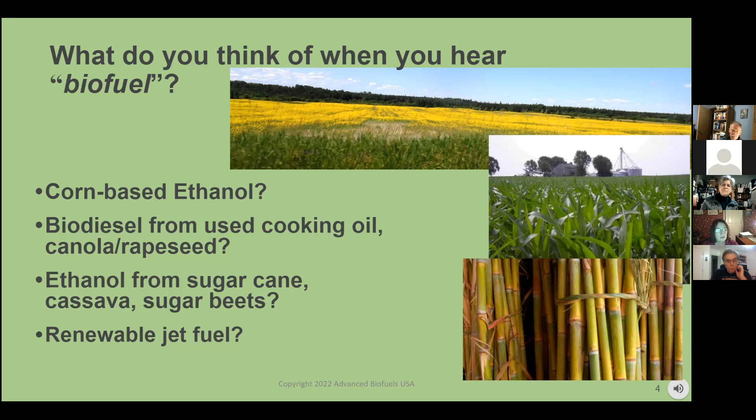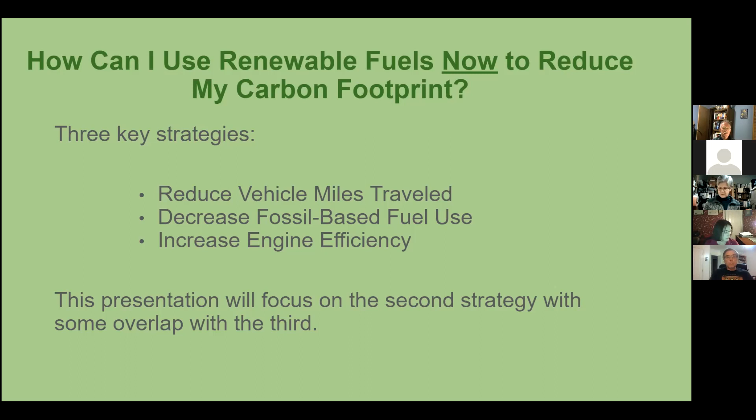What we're going to talk about a little bit is how can, we talked about what have you done this week, so I'm going to give you some ideas, or what you have done this month, of what you can do. I'm going to mostly talk about the second one on the list, decreasing your fossil-based fuel use, but a little bit on the third one as well.

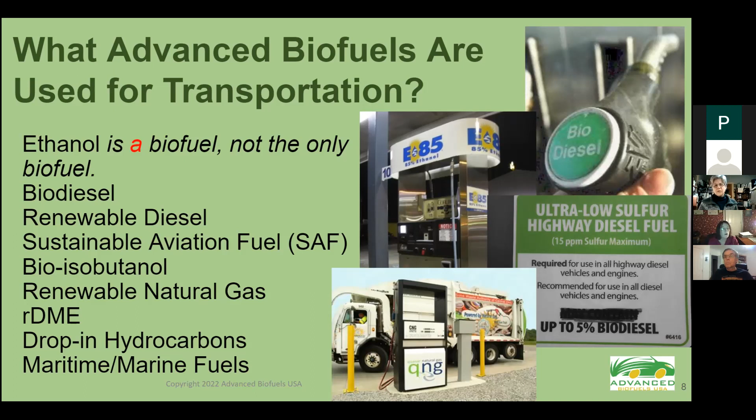So what are biofuels? What are renewable fuels, which is what I prefer calling them, and you'll see why. So what are they? Like we talked about, ethanol. Ethanol is a biofuel. It's not the only one. There's all of these other things that we can bioize. Sustainable aviation fuel has been in the news a lot, but there's anything that's fuel we should be able to get off of our petroleum and natural gas and renewabling it.

You'll hear about first generation, second, third, fourth generation. First generation is usually thought of as corn-based ethanol, sugar cane, soybeans, things like that, whose primary purpose is thought of as food.

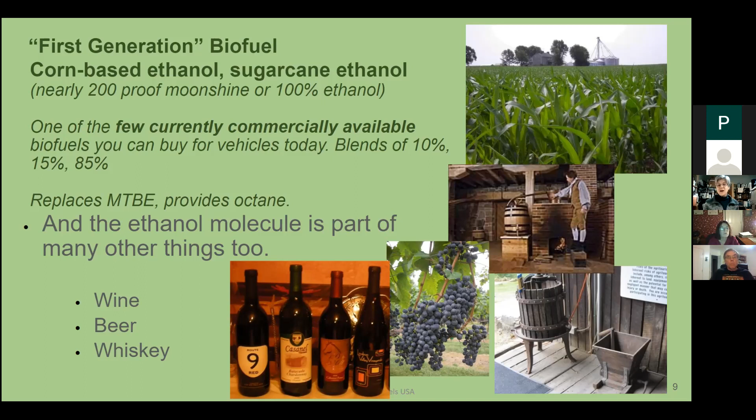When we talk about this, though, there's other things about ethanol to just know. You can use ethanol today. We all use it. You put gasoline in your car, 10% of it is renewable, as ethanol. Mostly because that ethanol replaces MTBE, which was a carcinogen that was banned in lots of states. And people might not realize sometimes the ethanol that's in your car is that same ethanol that's in your wine, your beer, your whiskey.

Like I say, talk about the 4 generations. What are advanced biofuels used for?

In history, the first Model Ts were built to run on ethanol, which, if you think about it, makes sense because there weren't gas stations on every corner, but everybody could make ethanol. So you would be able to fuel your car renewably and with the stuff that you used to use to feed your horses. So that was the idea, was that it was going to be a very distributed resource.

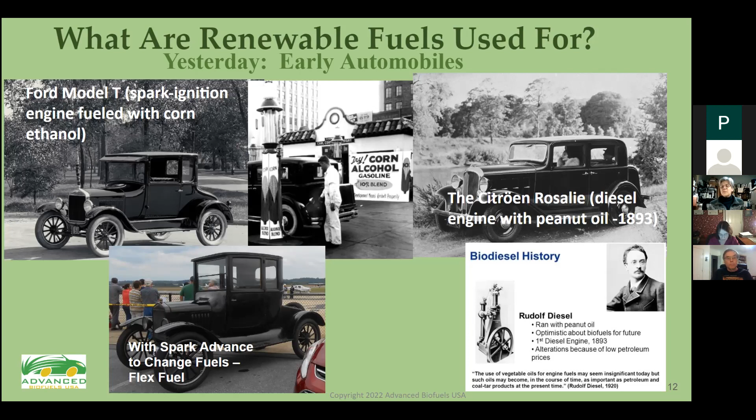And then the first diesels ran on peanut oil. Like I said, we started using ethanol to replace MTBE. MTBE was used to replace lead. So to get the lead out, we put in MTBE. To get the MTBE out, we put in ethanol. It also is very high octane, so you get higher performance.

And then other biofuels that we use are low sulfur diesels. So the renewable diesels fit in well with our working toward reducing the other pollutants that are in our fuels.

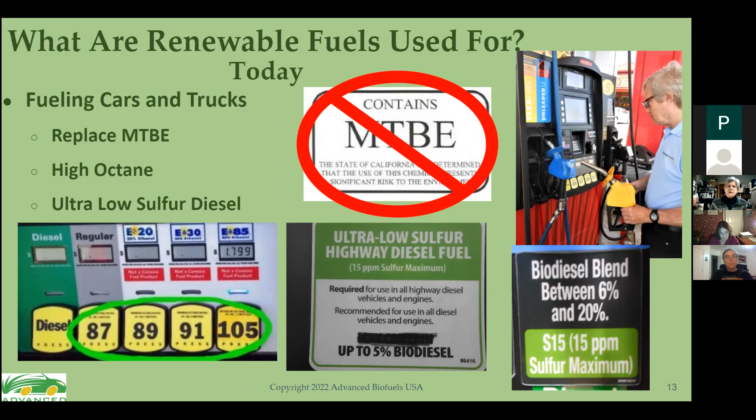How do we use them today? Racing. NASCAR uses E15. The Formula One is really where the innovations are happening now. And aviation, I think it's Netherlands, the airport in Amsterdam has started having a little bit of renewable fuel in every flight. There's not that much made yet, so it gets sort of spread out.

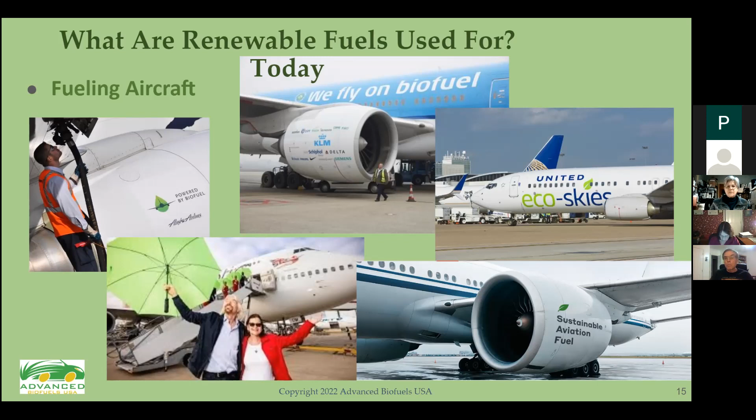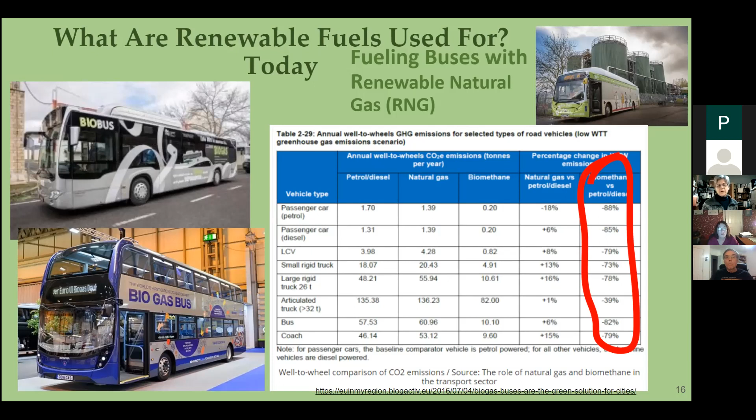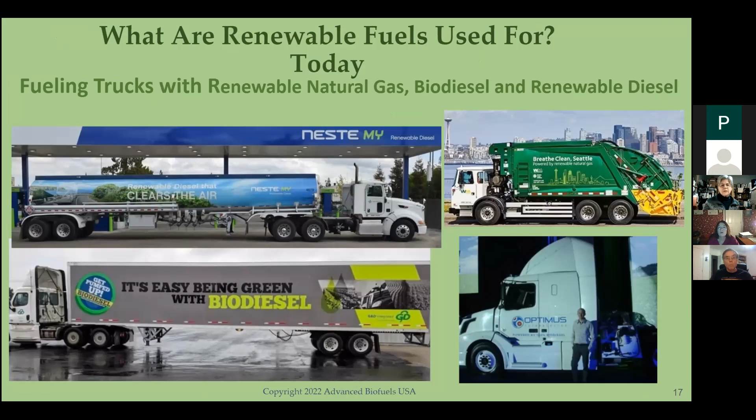And we use it in trucks, renewable diesel, biodiesel. We're starting to get to use it in trains with diesel technology, diesel engine trains. And then if you have a flex fuel vehicle, you can use up to 85% renewable. Your car will have something like that on it, or you can see it in your owner's manual.

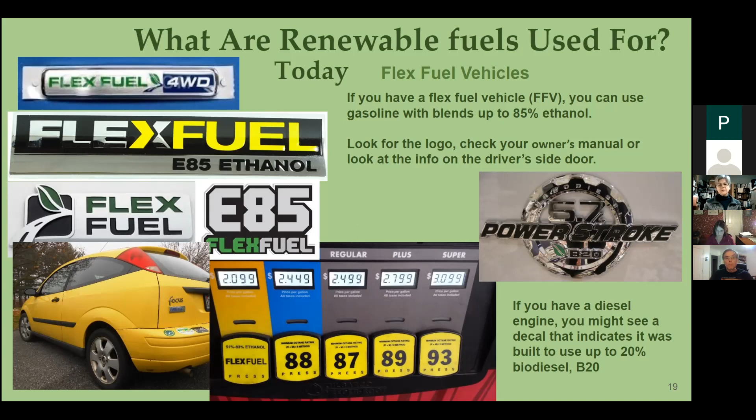We retrofitted my 2002 Ford Focus to be able to use E85. And also there are trucks, a lot of the manufacturers of diesel engines are warranting them up to 20% biodiesel. But if you have renewable diesel, you can use 100%. And how do you find your E85? There's an app for that.

The other thing is maritime fuels. This is becoming really important because the International Maritime Organization has regulations against sulfur, and using renewable fuels can address that need to get rid of the sulfur in your fuels. So there's a lot of interest in that use.

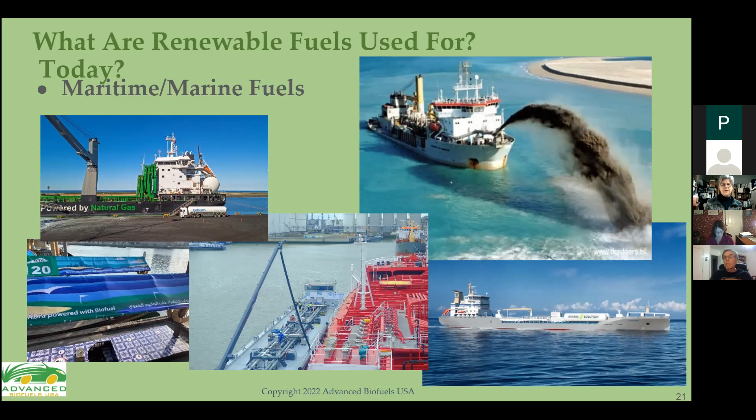There's military interest, although a few years ago there was more interest than there has been recently. However, with the price of gas and oil going up, the government will buy renewable fuel for the military if it meets mil spec and is at a competitive price with petroleum fuel. And with the price of oil going up, they may be using more than they were.

Although California, because of their laws and regulations, is really soaking up most of the renewable diesel and jet fuel. It can also be used for heating oil. New York and some of the Northeast states are really getting into requiring some portion of the heating oil to be renewable.

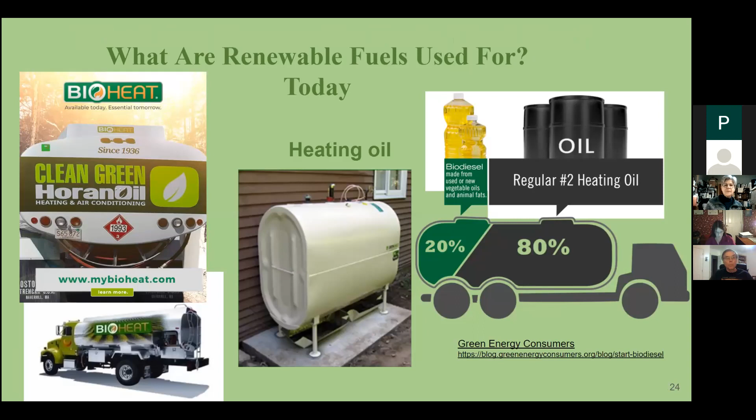And then a lot of people don't think about this, but cook stoves. In parts of the world where you use dung or wood to cook, that has lots of smoke and harmful health effects, so replacing that with a clean burning fuel like ethanol is really important. There's an organization called Project Gaia that's actually headquartered up in Gettysburg that does a lot of work with the United Nations on that.

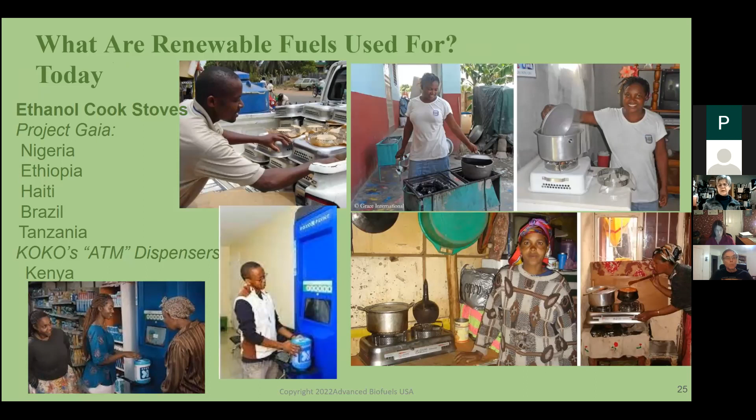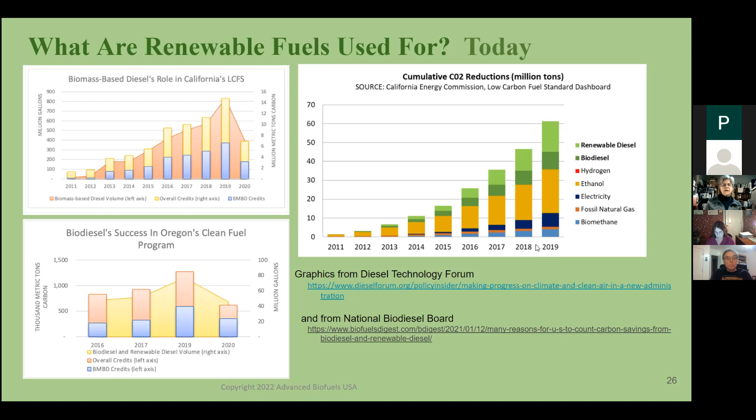So tomorrow, what will it be used for? We can talk about fuel cells, electricity through fuel cells in cars, with hydrogen or ethanol being used as the hydrogen carrier. And advanced engines - E30 now can be the sweet spot in engines. Like I said, there's our old Focus that was being retrofitted.

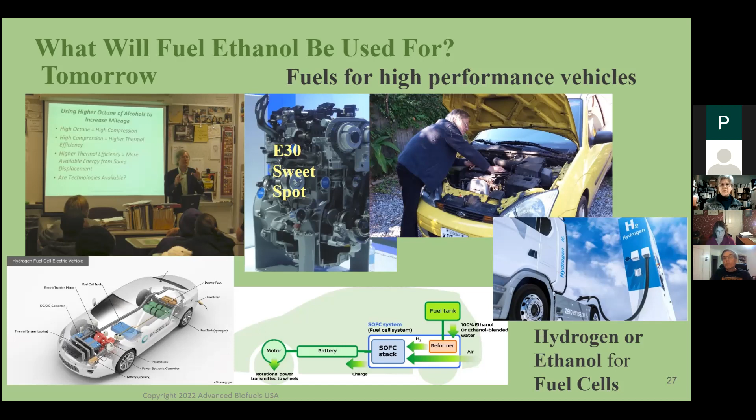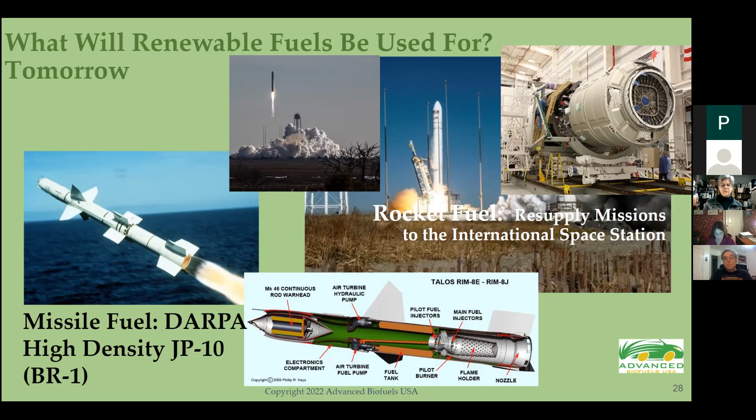So how are they made? The main point is that if we're going to get off of petroleum and off of fossil natural gas, it's going to be agriculture, forestry, aquaculture, and waste management. That is where we're going to have to be finding our energy. And the point we try to make is not - I don't like policies that are all of the above. I want all of the above ground. I want to be recycling the carbon that we already have taken out of deep storage.

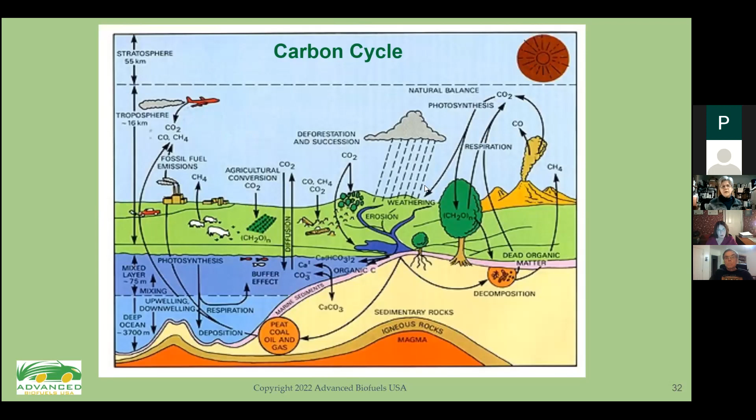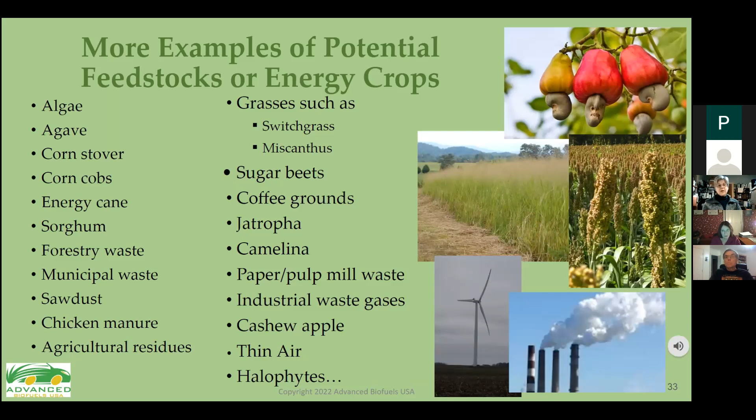So how are we going to do that? Here is a list of some of the things that you can use to make renewable fuels. But this is not fun to look at a list, so we're going to look at a lot of pretty pictures. So you've got grains like sorghum.

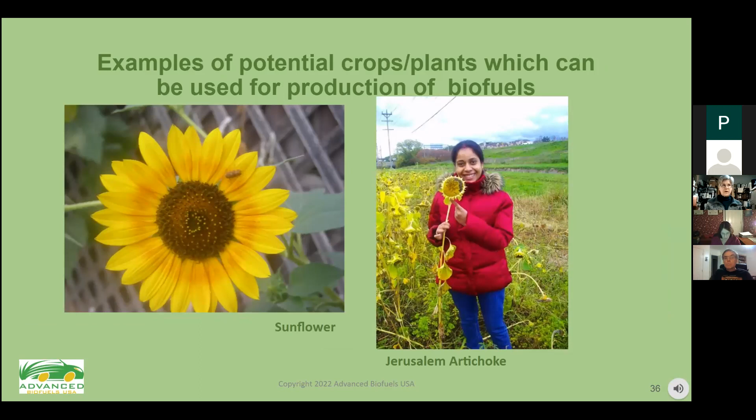We've got soybeans, and oil seed crops like sunflowers, Jerusalem artichokes, canola, carinata, camelina, pennycress. A lot of these can be winter crops, cover crops, or rotation crops. So you can help do your regenerative agricultural practices by using some things that will also have a market for.

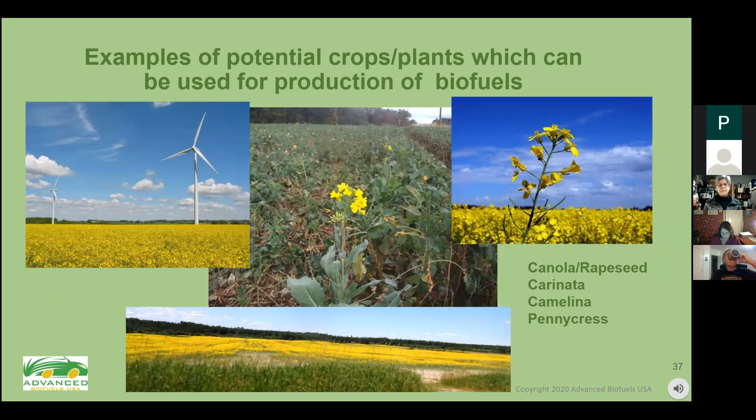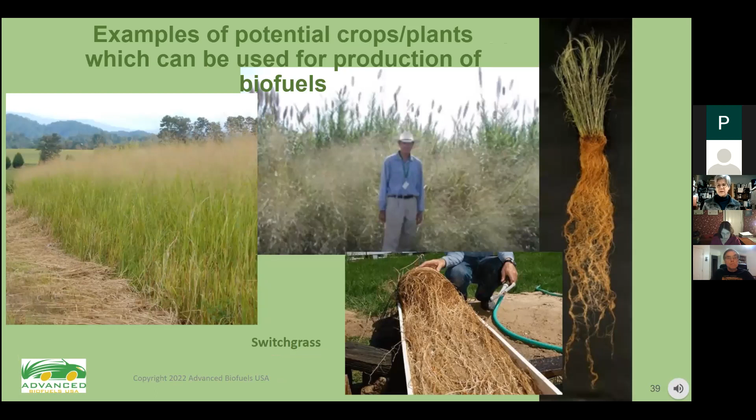And grasses. One of the things about grasses is it might also be planted as erosion control, because look at those wonderful roots.

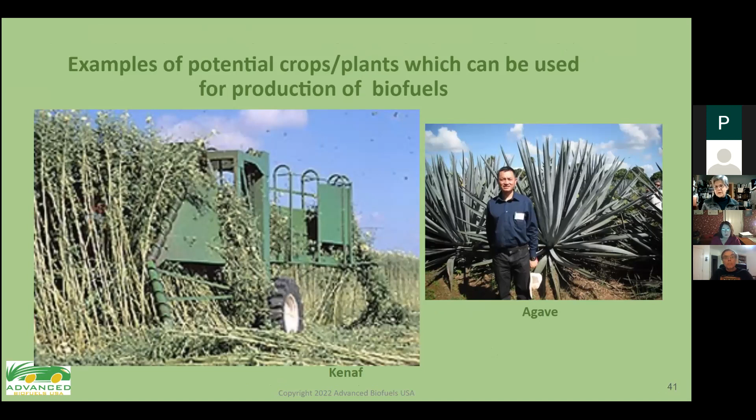Energy tobacco that's being researched down in Virginia. Kenaf, agave - depends on where you are in the world on what is the appropriate feedstock. Cassava, or these different oil seed trees like jatropha, moringa, pongamia, castor bean, jojoba, neem.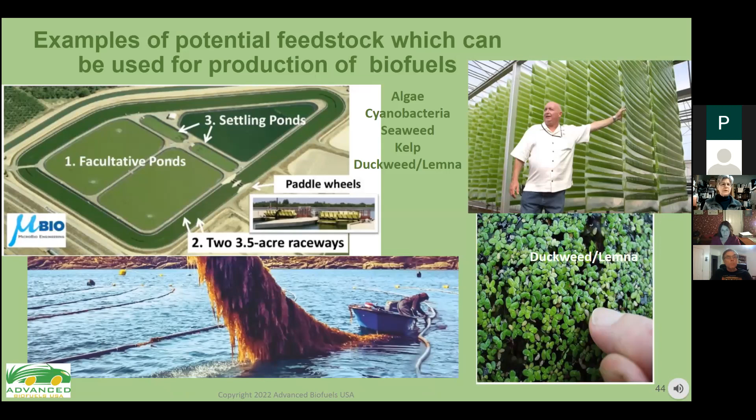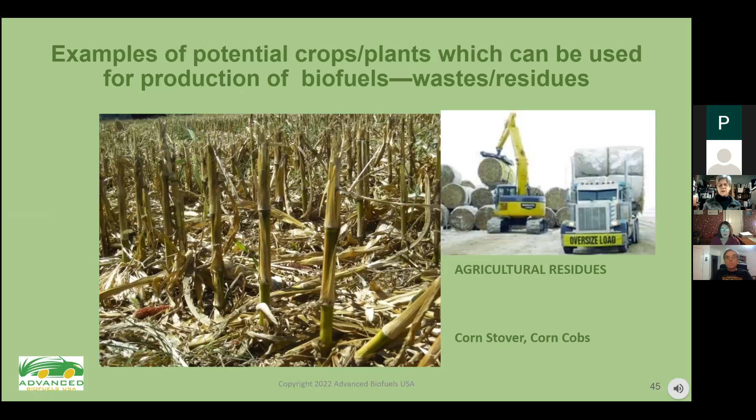Agricultural waste and residues like corn stover and corn cobs, sugarcane bagasse - the leftovers when you make table sugar out of sugar beets or sugar cane, what's left over to be able to make it. And then there are beets as an energy crop - these pictures are from research at University of Maryland Eastern Shore a few years ago.

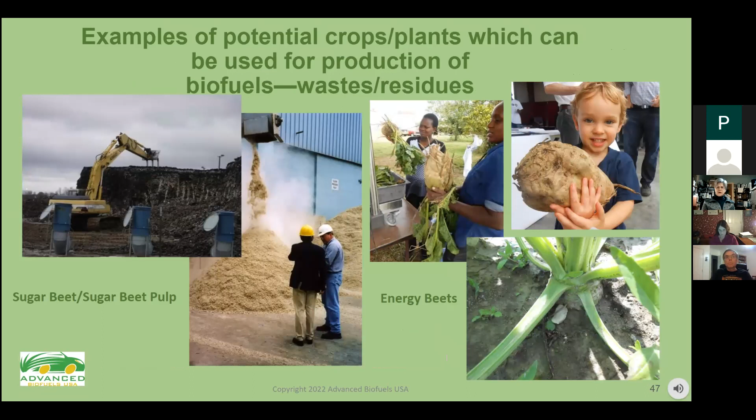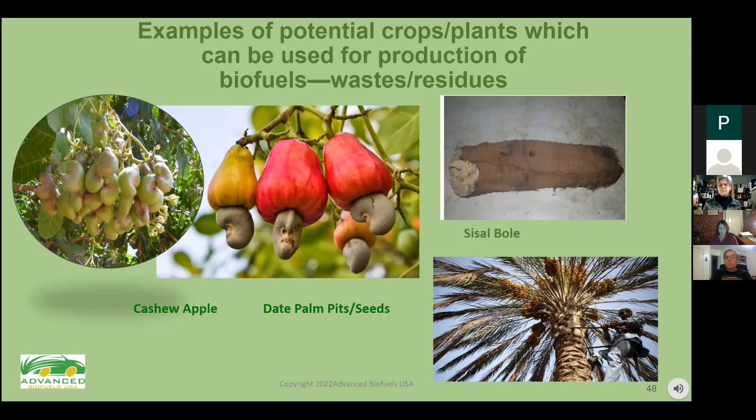And also other agricultural waste. I was amazed to know that there is what they call this cashew apple on every cashew, and that is all agricultural waste. So in Tanzania, they're working on trying to ferment that and make ethanol out of it. And then you've got other kinds, like date palm seeds, things like that.

So the research being done is taking the residues, because you only use the buds if you're going to make your medical or recreational marijuana, or only use the buds for your CBD oils. So the whole rest of that plant is available to convert to the building blocks of fuels and chemicals, replacing petroleum and natural gas. That research is being done at Hood College, at UMES, and at Ohio State, a group that is working on that research.

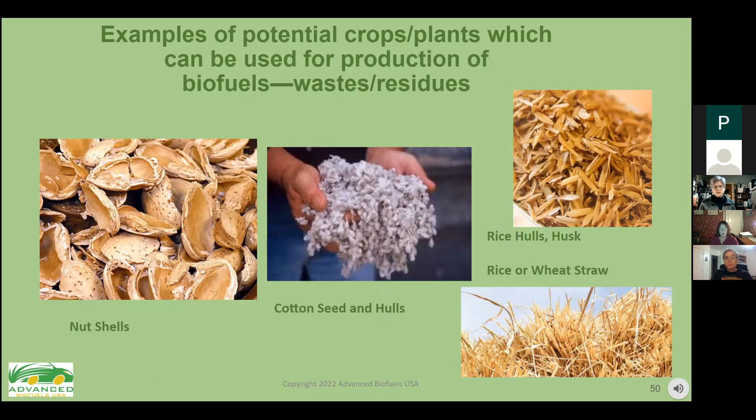Nutshells, rice, wheat straw, all these agricultural or forestry residues, the sawdust, or growing crops specifically as energy crops, either for pelletizing for heat and power, or for renewable fuels.

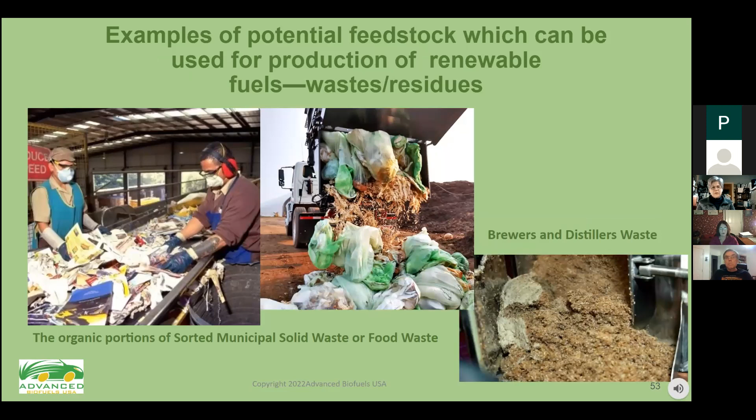And waste: your municipal solid waste, food waste, distillers waste, brewers waste. We've got a lot of that around here in Maryland, and using that.

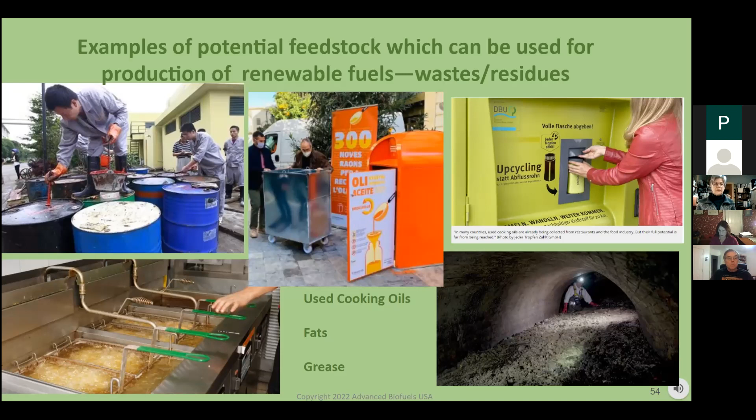And you've probably heard about used cooking oils, fats, and greases. This picture in the middle is in Valencia, Spain, where neighborhoods have places where you can take your used cooking oil, and it gets collected and turned into renewable fuels, or added for animal feed. This picture on the right is what they call a fatberg in the UK, where people have thrown their used cooking oil into the sewers instead, and you get these horrible, awful clogs. So making renewable fuels out of it would be a better idea.

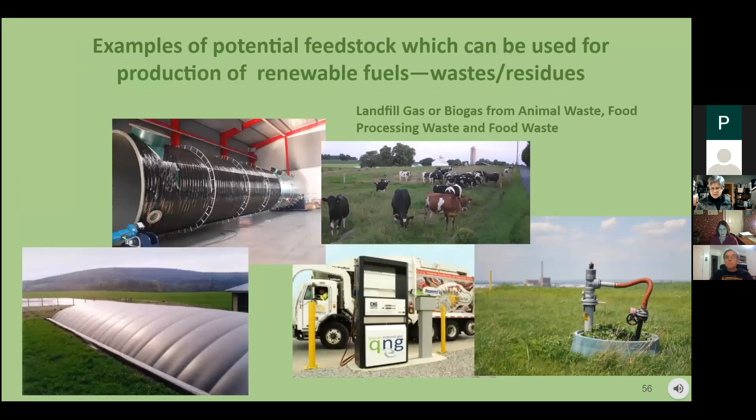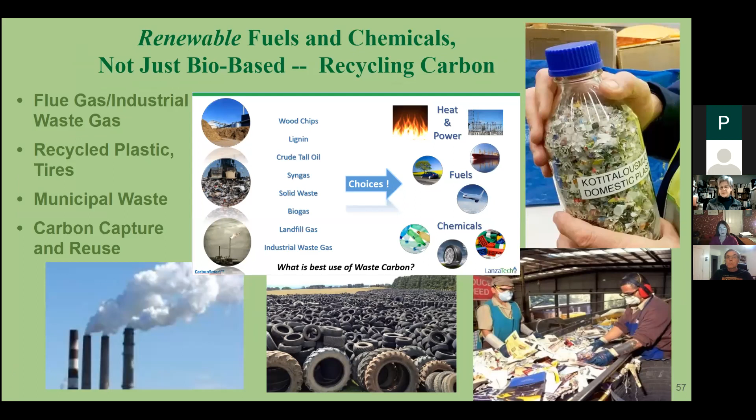Tannery waste, landfill gas or biogas from animal waste and food processing, flue gas, recycled plastic and tires, municipal waste, carbon capture and reuse — all of these different things go through a process to make renewable fuels.

And here's another reason I like calling it renewable fuels. We've got hydrogen. Hydrogen can, like we said, fuel cells, or green ammonia, particularly for maritime things. And then my renewable hydrogen plus captured carbon dioxide — you can then make renewable fuels out of that.

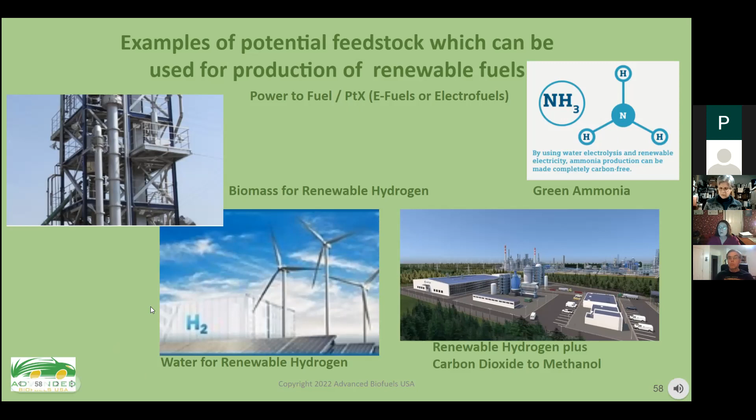So it's a balancing act. How do you get the best out of what you have available?

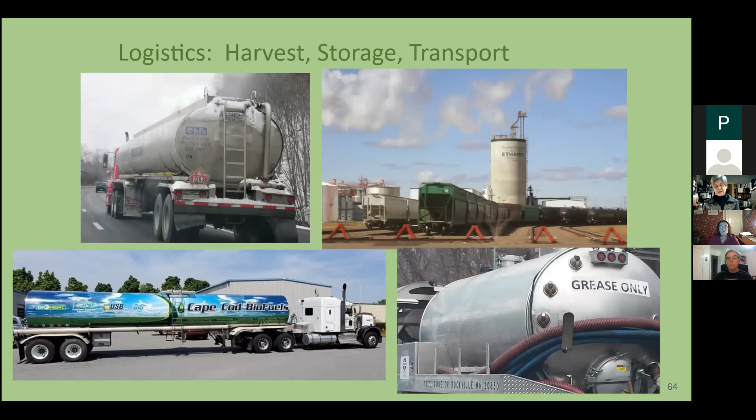On logistics, you've got to move this stuff around. You've got to harvest it, you've got to store it. When you make the fuel out of it, you've got to move that around. You're collecting grease — you've got to move your grease around to get it to where you're going to turn it into fuel.

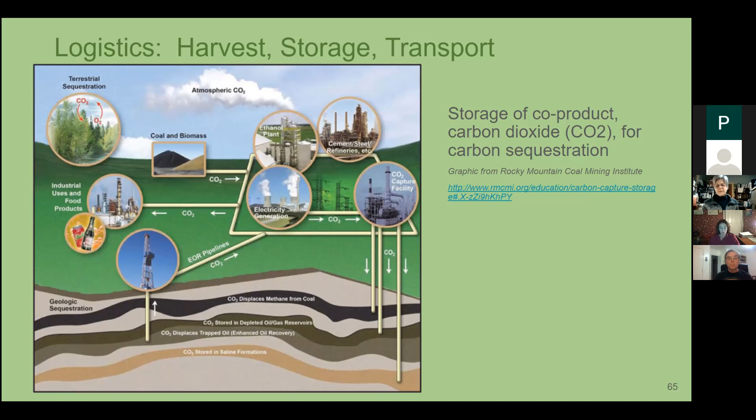If you're capturing that carbon — if any of you have made beer or wine, you know you get carbon dioxide as it ferments. At these big ethanol refineries, they have lots of carbon dioxide. They can sell it for putting in beverages, for medical uses, for food processing stuff, but they can also make enough to store it underground, to capture it and store it. There's a facility in Illinois doing that now.

Technology — you've got lots and lots of feedstocks. You have lots of different ways to deal with them, to convert them into the building blocks of your fuels or chemicals and everything that you get out of your fossil fuels.

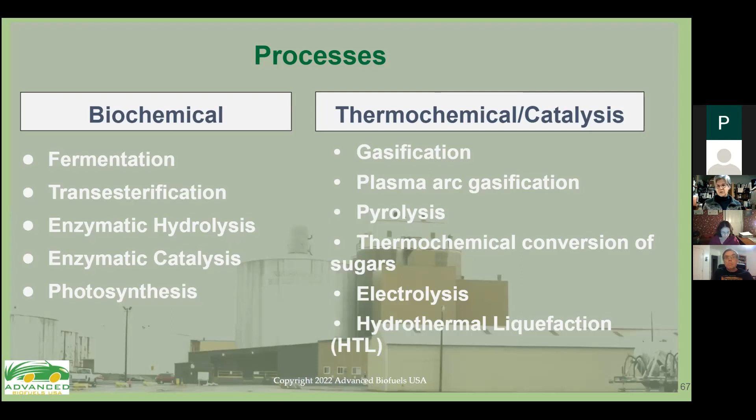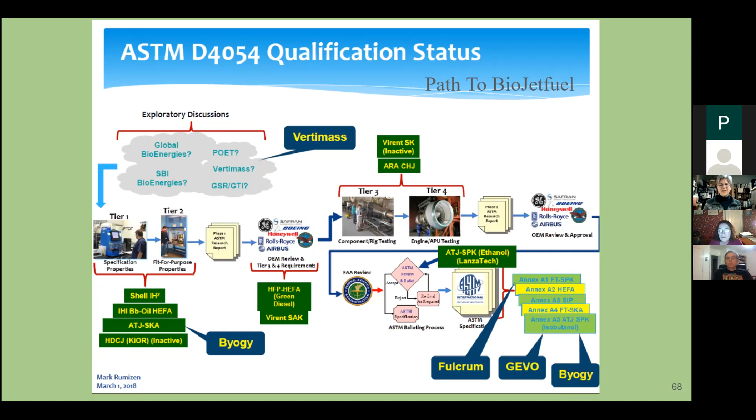If you're making jet fuel, this is just to assure you that there's a long process between making the fuel and getting it approved for use. This is generally a depiction of the process that has to go through.

What we've talked about here is generally, when we talk about biofuels, it starts with something living. There's a process that it's going to go through to take that apart, and then other processes that it's going to go through to put it back together to make our final products.

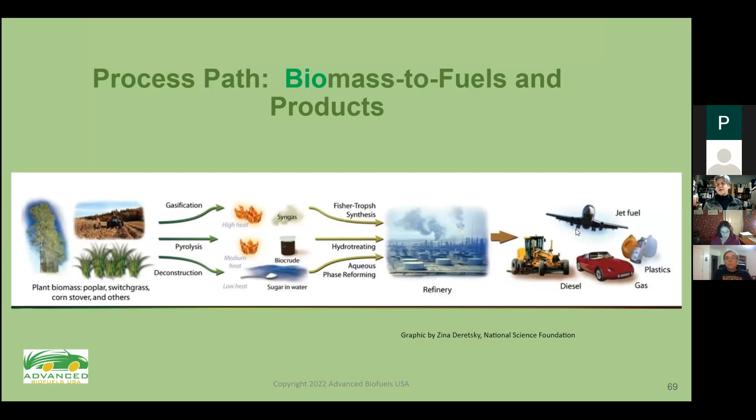But it's not all bio, like we said. So some of them are going to be e-fuels. You might have electrolysis where water is basically your feedstock, and that's where you get your hydrogen. You can also get hydrogen from bio sources, like biogas, landfill gas and things like that. But a lot of the time water is going to be your feedstock for making hydrogen, and then you connect it to CO2 from various sources to make some of your fuels.

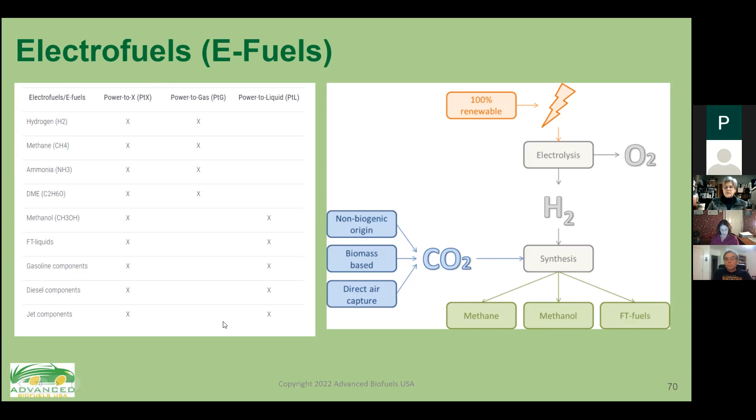And here's a list of some of the fuels that would be included as an e-fuel or electrofuel.

And then there's recycling plastics. I think there's some interesting sustainability conversations to have about this - recycling plastics into plastics, or recycling plastics into fuels. If all the plastics were bioplastics, putting them into fuels wouldn't be such a big deal. But is plastic sort of a way of sequestering carbon? Should we just keep plastics staying plastics, just keep recycling plastics into more plastics? We've all got computers, they're plastic. We're not going to live without plastic.

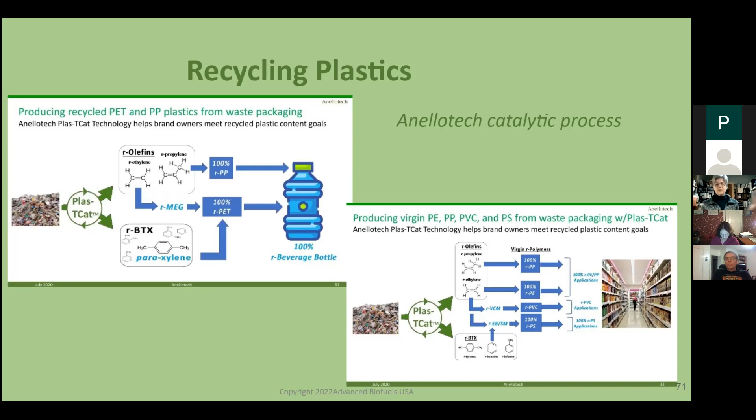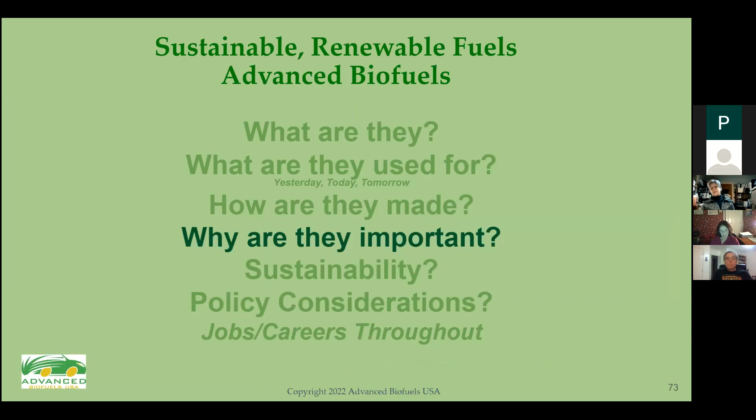Green ammonia, like I said, for maritime fuel. And why are they important? They're important because this is what we have, and this is what we could have instead.

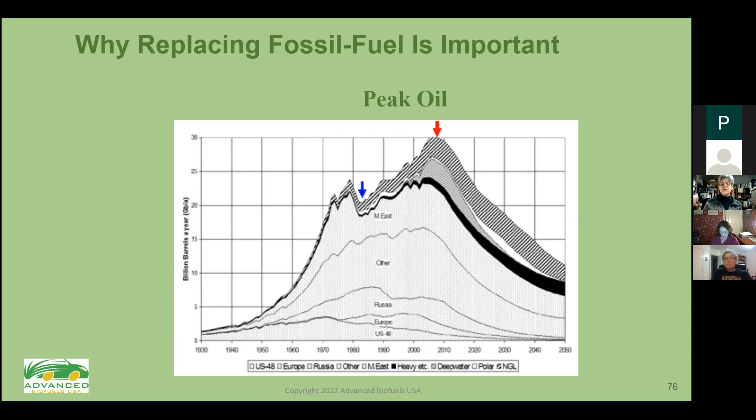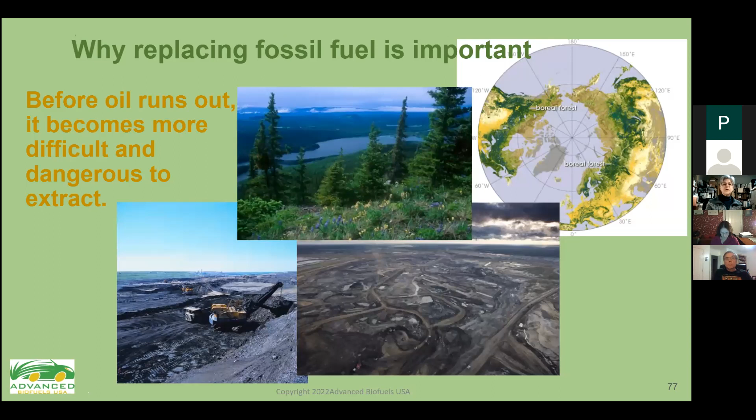Eventually, if we keep going as we are, we're going to have peak oil. But if we stop using petroleum, we may never reach peak oil, and that's going to be just fine. The other thing is, before that oil runs out, it becomes more difficult and dangerous to extract. And this is where I'll take a moment to remember the 11 people who died because we're using oil.

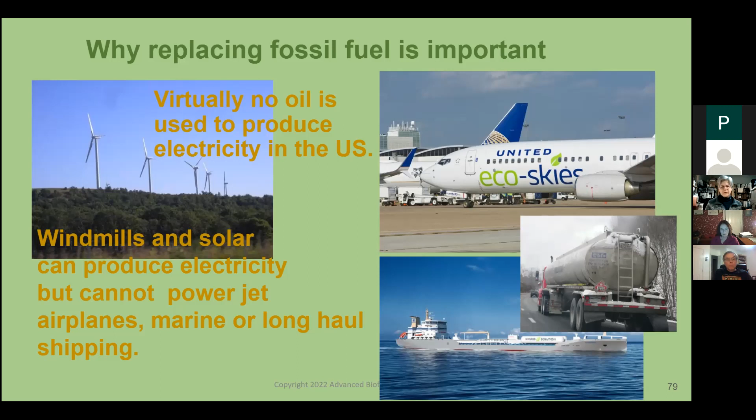We don't use oil to produce electricity in the US, very little. So wind and solar aren't going to replace oil, especially here.

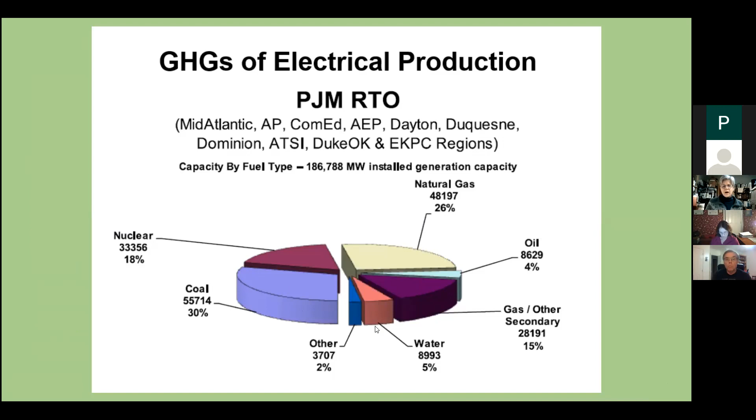If the electricity projections don't come out the way that we think they will, this is really, really essential. Even if they do come out the way we think they will, and even if this electricity turns into renewable electricity, we still have a lot of liquid fuel here that we're going to be using, and that should be renewable.

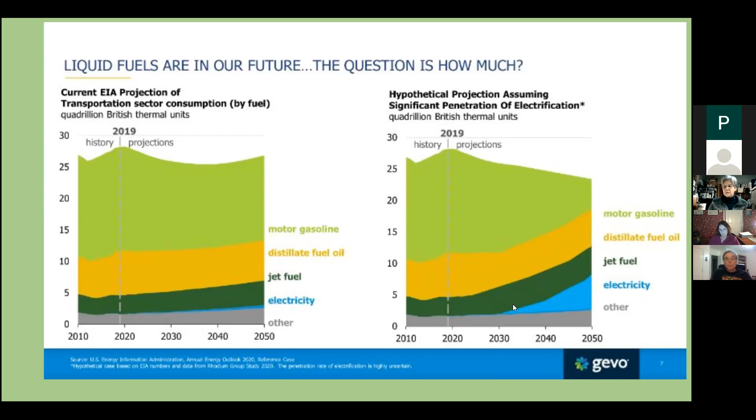And then there's the geopolitical issues. Some of you may not be old enough to remember the gas shortages in the 70s. If you're not making your own fuel, somebody else can control you - just ask the folks in Europe about what's going on with Russia.

And I said before about MTBE - a bunch of states banned it, and so ethanol was used as a cleaner replacement. Maryland is very famous in this because there's two big lawsuits about the water table that was damaged from MTBE leaking out of gas station tanks. I think the people in those areas are still getting bottled water.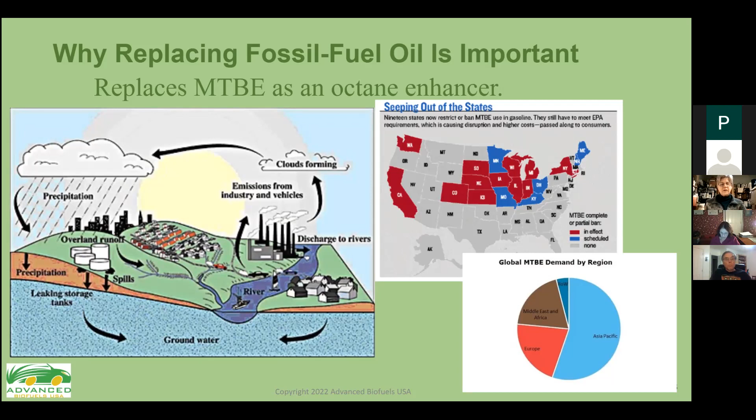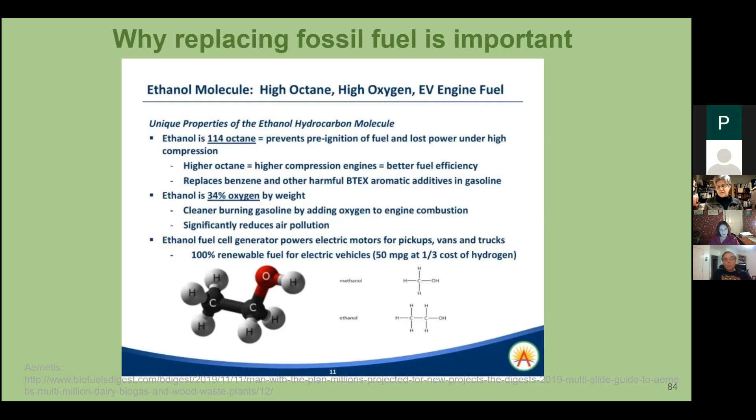An ethanol molecule is a really, really useful molecule for addressing a lot of these things that we talked about. It's got high octane, and it can replace the MTBE and perform as a wonderful fuel. Now, it isn't as dense as petroleum fuel, so you'll lose mileage, but there are engine developments being worked on to build engines that are designed for high octane, which can be provided by ethanol and other things, instead of trying to use ethanol in engines that are designed to optimize gasoline.

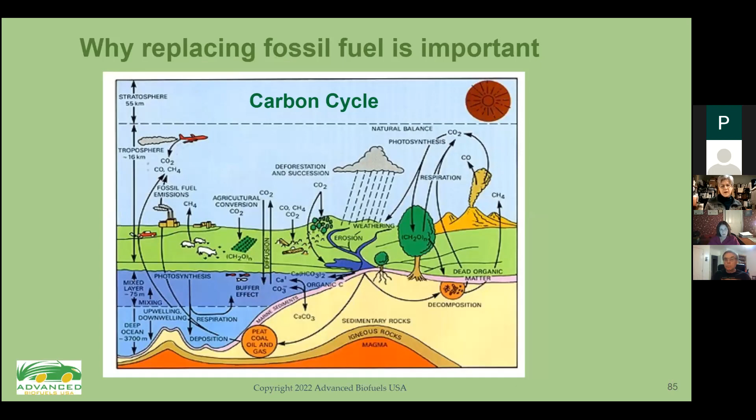And again, replacing it is important because we want to just keep recycling what is already out of deep storage, instead of bringing up new. And then, as I sort of mentioned with the fatberg, there are all these ancillary benefits that come with converting to an agriculture, forestry, waste management based way to fuel and power ourselves instead of petroleum and natural gas.

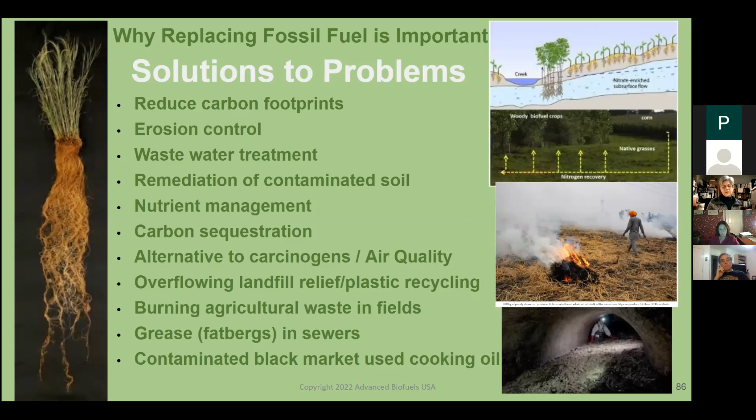You guys know this stuff, but I thought I needed to mention it - the three-legged stool of sustainability. None of this is going to happen unless everybody in the value chain can make a living, at least make a living. And it's got to be environmentally sustainable, or that's not worth doing. And it has to fit into the social fabric of wherever you're doing it, whatever you're doing.

And some policy considerations. Some years ago, there was a great daily show where all of these 8 presidents - and now I suppose we could add some to it - all said we're going to get off our addiction to oil. And we're still working on it.

The policy that was developed back in 2005 and then 2007 is the Renewable Fuel Standard, the federal policy. We've definitely reached the corn ethanol limits there. The advanced ethanol, or the advanced fuels piece - like you can see from my presentation, we've got it. It's not impossible, it's possible, but it's just not as easy as they thought it would be. And again, California is doing it.